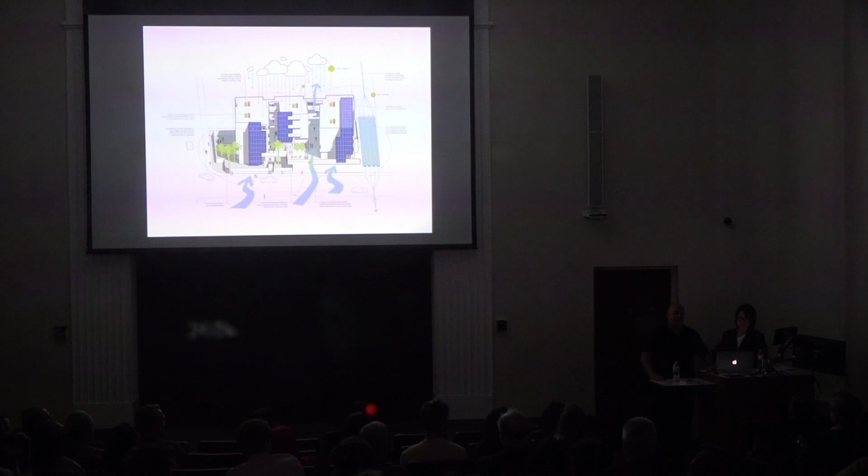That was our first housing project, and we basically begged that client to hire us. We thought we were just doing the right thing - my mother would call it Jewish common sense. It was the first LEED certified building in the country. We actually helped them develop the standards, and at the time we just didn't think we were doing anything special.

It was a building designed to be energy neutral, so we had two active systems: solar panels and a microturbine. In the city of Santa Monica in 1994, they called themselves a sustainable city, and they were trying to formulate these goals for themselves, so it was a demonstration project.

Each unit was only 375 square feet. They were very tiny, and all you really need is one window on each side of your unit to get cross ventilation and keep the units cool. The whole project was designed to capture prevailing breezes and really be a passive building, and I think you all know what that is.

44 small studio apartments for people with extremely low incomes, and the project wears its energy-generating solar panels on its sleeve. It has a large stormwater system under the public alley in back that collects rainwater from the entire block. A lot of the project images show you the density - this is 127 dwelling units per acre, because we think there's a direct link between density and livability.

The solar panels for us really gave this building a sense of dignity. We had to get state legislation changed to allow projects like this to be built - the solar system was actually larger than allowed by the state at the time.

Each element on the building does more than one thing. The walkways actually shade the south facade of the building, and the solar panels are hung off of the exit stairs.

We use really simple materials that are inexpensive and don't need maintenance. The walkways not only shade the building, they also hide the downspouts and gutters - which is one thing I really hate seeing on apartment buildings - and they direct all the rainwater to the alley.

The solar panels that shade the walkways also let light filter through them. This building has no need for air conditioning and has very minimal heat. The units are really tiny, but basically it's everything you need.

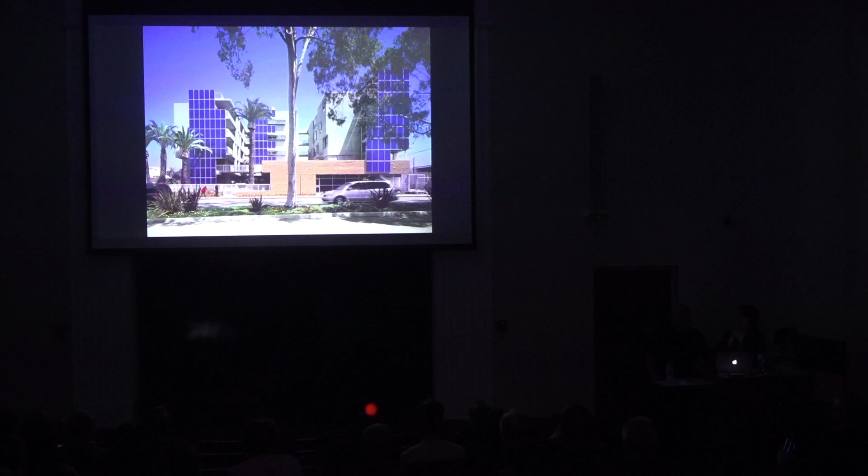We thought it was easy. Our motive in some ways for getting into it was selfish, because we'd look at other affordable housing projects and think, it's really easy to do better than the stuff they're building. But we began to think, is what we're doing really any better than this?

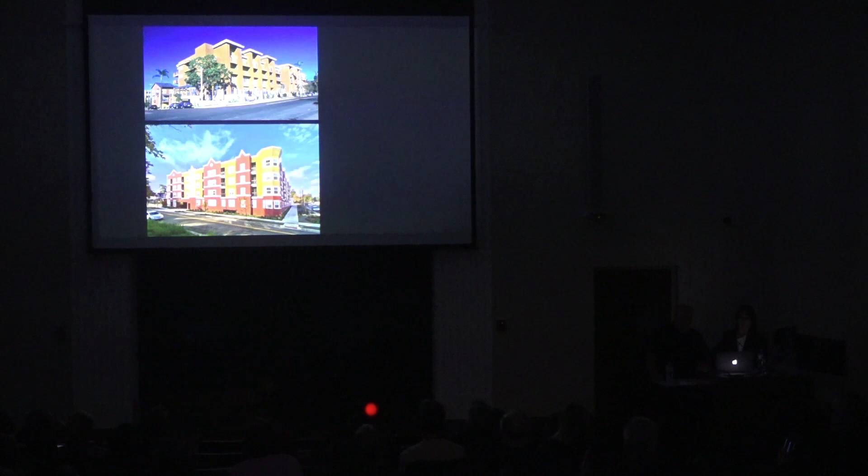So it was at that time we talked to some of our friends, and we started to meet in our office the first Saturday of every month to talk about issues surrounding housing, affordability, and sustainability, and to work on ideas where we could not just change design, but change policy - and also work with other developers.

We knew Los Angeles needed to densify, so we actually held planning charrettes on the weekend, invited friends, and tried to visualize good neighborhood density. How many acres should one architect design in a neighborhood? I think we came up with 2.

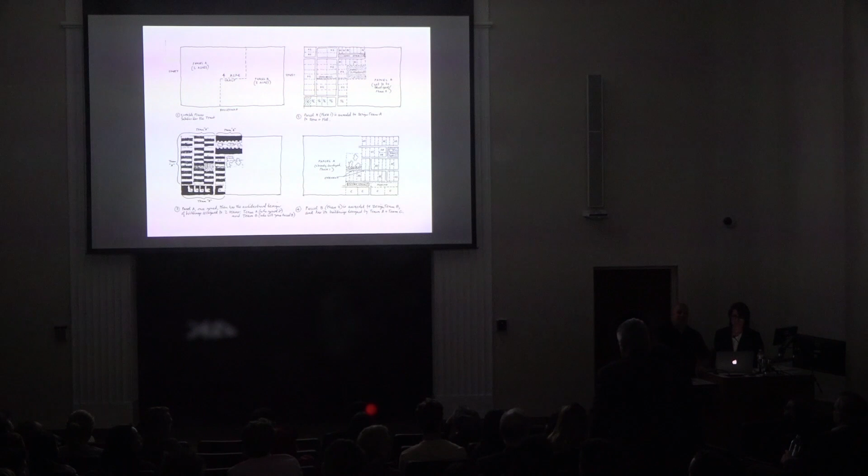This was something Roger Sherman did, where we looked at densifying the single-family neighborhood, which everyone was telling us was political suicide - and we're going to come back around to this later in the talk, because Los Angeles hates two things: sprawl and density.

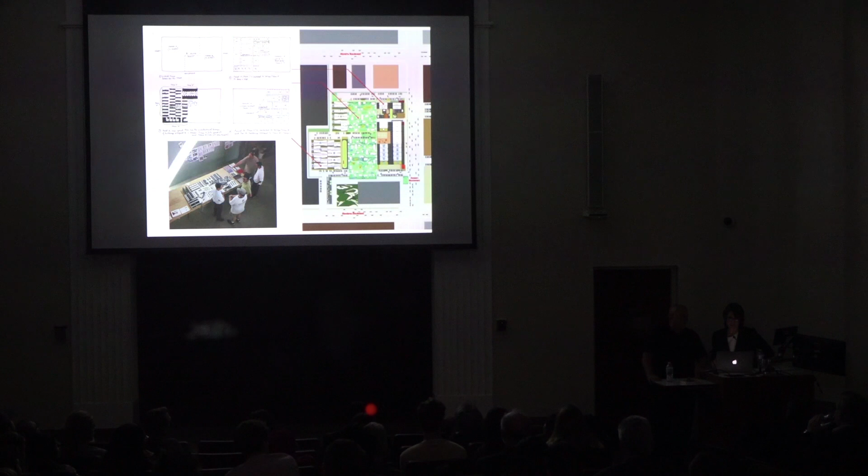We researched what other states were doing, and the state of Massachusetts has a law called the Anti-Snob Initiative, which means that any political jurisdiction, if it's not building enough affordable housing supply—less than 10% of total housing—then the zoning is automatically deemed discriminatory and can be ignored by any developer. So you can go into a single-family subdivision and build multifamily affordable housing by right. They found it also helped geographically disperse income levels.

We wanted to prioritize the benefits of good design as a way to both solve problems developers thought were intractable and create better living environments. We got an NEA grant to do a competition to build the project, which we did in Long Beach. This is actually Olivier Touraine's entry to our competition. He didn't win, but he was very close at the time.

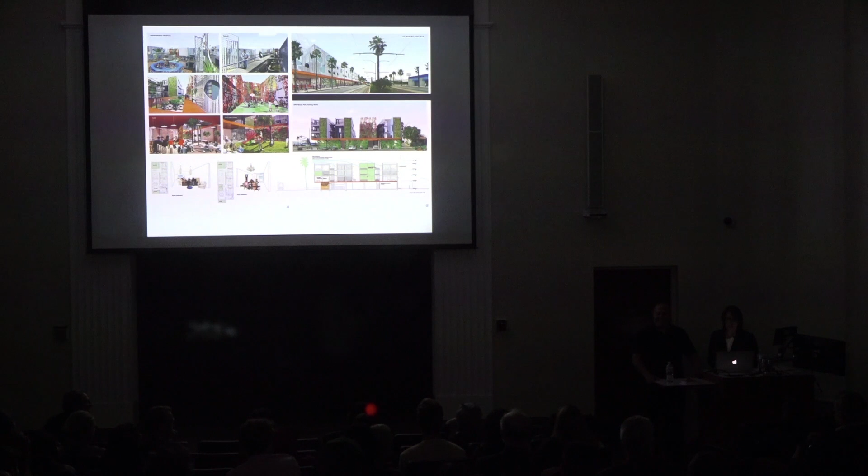We were looking for new ways and new models of how we could provide housing differently. This project is along the Blue Line on Long Beach Boulevard, and we discovered that the City of LA was building transit and transit stops in areas zoned industrial where no one actually lived. There were zero people living within a quarter mile of this transit stop because it was illegal to build housing there. When we went to the city and told them that, they said, no, that can't be right, and asked where we got our data. We said we got it from them. At that point, they said, well, we have to change that. So they upzoned Long Beach Boulevard to allow housing.

But average monthly rents keep increasing, and that eats up a large percentage of household incomes. Affordability is defined as not spending more than 30% of your income on rent, and in Los Angeles almost a third of us spend more than half our income on housing. It used to be that if you worked you could get ahead, but now we have what's called the working poor, and housing is getting more out of reach for everyone.

At our current minimum wage, in every state in our country, one person working full-time with two kids would live near or below the poverty line.

After we were working with our group—just kind of a ragtag group of people, bankers, affordable housing developers, for-profit developers, architects, landscape architects—we spent the better part of a year and a half doing all these ideas, and we said we should try to do something more meaningful. So we wrote some grants and wound up getting almost $1 million in grant money.

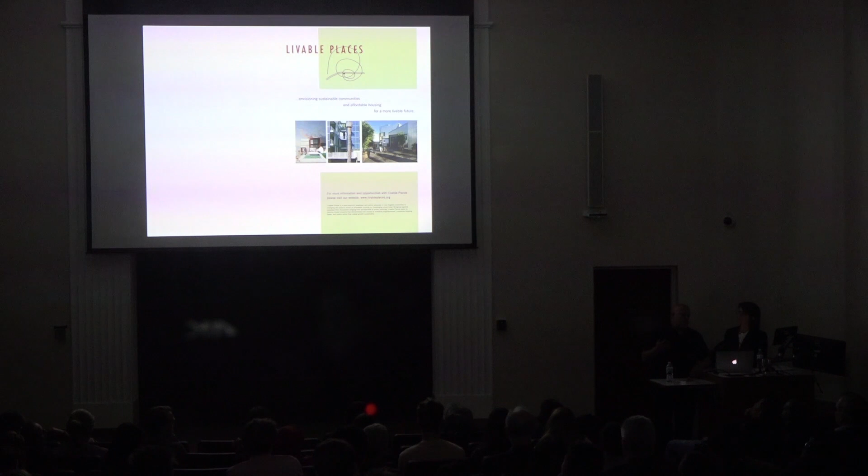Overnight we became this nonprofit called Livable Places, which was really our night job. When we started it was our group, and eventually we wound up with a full board doing policy work. Our goal was to build model projects and use the developer fees to finance policy work—we didn't want to just do buildings, we were looking to affect change through policy. What turned out is our policy actually drove our development, but we did build some buildings.

This is one of the first buildings we purchased, in Lincoln Heights—the old Fuller Paint Company building. It's an area just outside of Los Angeles, and we realized our new light rail at the time, the Gold Line, went right by it. So it was another neighborhood where we built transit and no one actually lived there. A lot of industry was there, it's an industrial zone. The site sits within a quarter mile of a Gold Line stop, a park, and a school, and no one was living there.

That's right across from the old prison. But with political support—the council member at the time agreed that we should have transit and housing in the same neighborhood—he agreed to work with us on this project.

So we purchased the building and added 2 floors to the roof. It's 102 condo units, both commercial and residential, mixed use and mixed income levels. There's affordable housing in the yellow piece, the existing piece, and market rate housing above. We basically cut a hole in the middle of this big concrete building to let light and air get into all the units, and wrapped a large exterior patio and frames on the roof. You get really good views of the city and the mountains.

But the principles of smart development were illegal at the time in this area, so this was really a demonstration for us, and we wanted to make an example that others could follow. It took us an entire year and 25 planning variances to allow what would be considered smart growth today—things like reduced parking near transit, additional height, additional density, narrower streets.

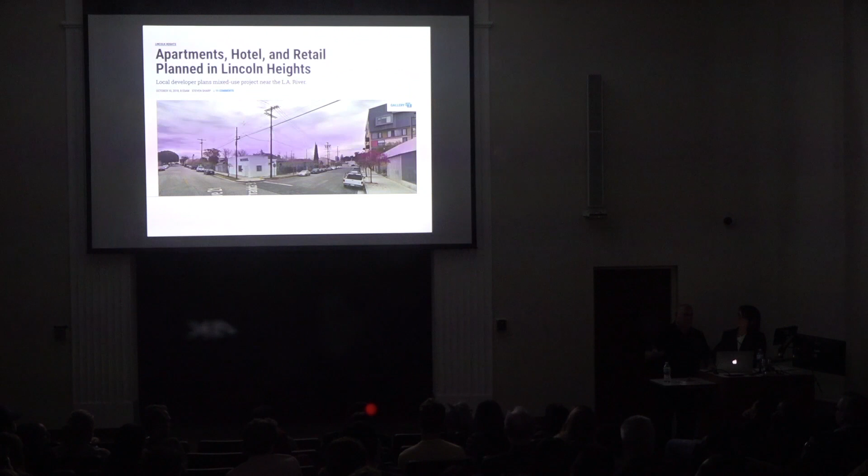Developers came in and bought all the property around us. So we were now out of our own market, and we had kind of mixed feelings about it because we were achieving our goals of helping revitalize the neighborhood, but we were no longer a part of it because we couldn't afford it. And so most of you that are here now know what's happening with Lincoln Heights, and we were really the first people to go in there.

So this is, not too long ago. This is this past year. Now the old prison, the city put out an RFP, and they're moving forward with these kind of grand plans for Lincoln Heights.

And the sad part is this is what's happened to our project. These were meant to be for the poorest of families, and now these units are selling for $500,000 in there.

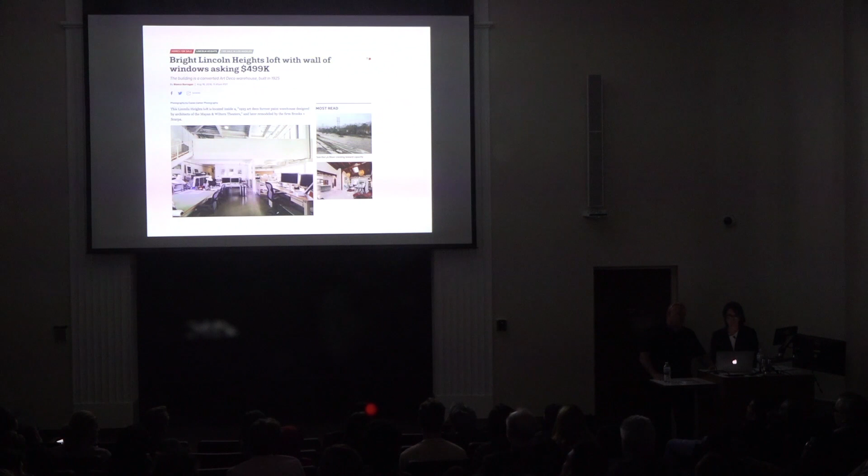So this is something we struggled with as a group. Should someone be able to profit from their unit? How do you deal with keeping things affordable? For us, it was all new and a bit of a learning experience.

And the market also crashed, right, when we started construction. Minor detail.

But going back to what Angie was saying about the city not knowing their own rules, they would come up with ordinances like promoting density around transit corridors, and we would show and prove to them that they had zero housing in their transit corridors. So we started to do all these different studies, and we became very close with the planning department. I'm not sure whether they liked the way we were, because we were constantly throwing planning amendments at them. That was when the planning department just processed permits and didn't really do any planning themselves.

And so we were doing the planning for them, and this one was a bikeway study. We showed them that LA actually had bikeways, but they were all disconnected. And this was our plan to show how they could stitch all the bikeways in LA together and make it like a unified system.

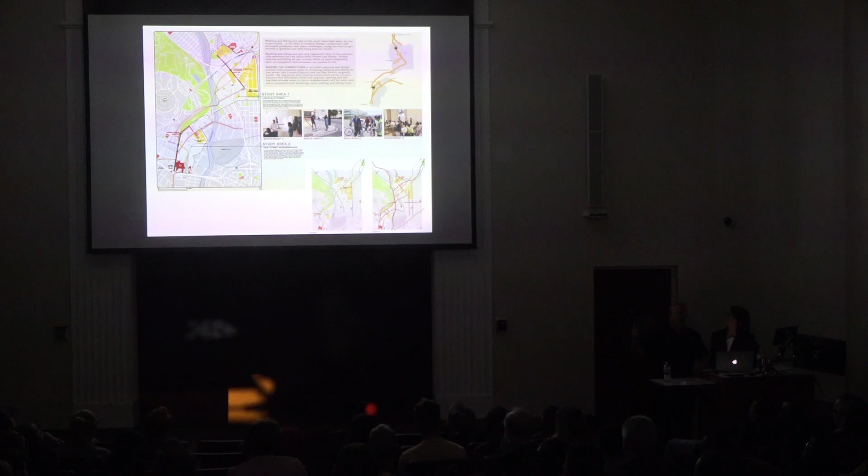The other thing we did, which really stuck, was we actually wrote the Small Lot Ordinance, which most of you are probably familiar with. That came from our group, and we put that forward as an idea, which goes back to that diagram I showed you that Roger sketched out one Saturday of densifying the single family lot. This effectively did that. If you know the ordinance, it really changed density in a single stroke.

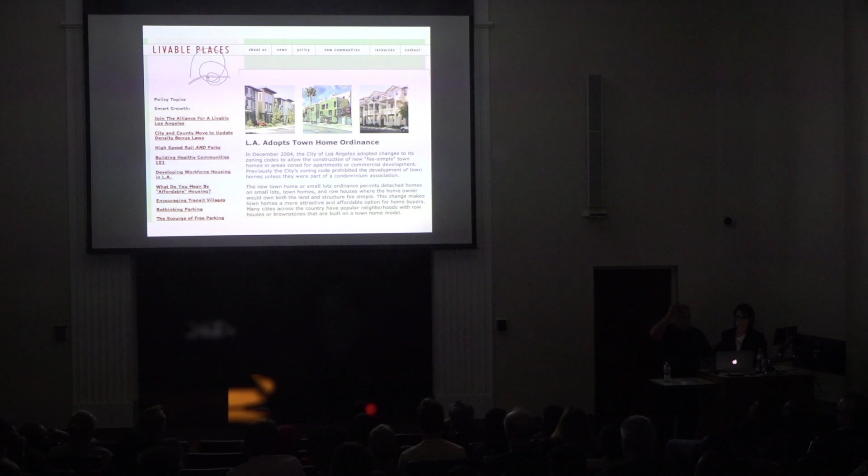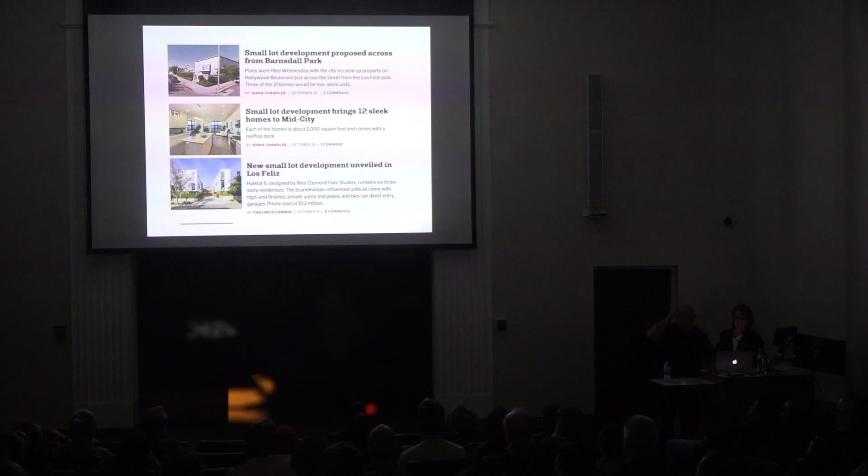And the city took it and they adopted it in a little bit different way than we wrote it. But now there's actually a website for the Small Lot Ordinance. And those of you who practice have probably done a lot of projects through this ordinance, and I'm just kind of tracing some of the history of what's happened with it, and even the projects that were built.

We see them, they're not even ours. This one is our project, but some fantastic projects have been built through this, including ones that we continue to do. So we're benefiting from our own push to change policy.

But like all good things, people start to question it. So we always thought policy was like forever, but what we're also learning is that it's not permanent either.

And so now there's a lot of talk, they've made changes to this ordinance. And what's funny is when we go in there and talk to them about our projects, they tell us that's not the intention of the ordinance. And I go, well, that's kind of funny, I think I know a lot about what the intention of it is.

Who doesn't know who this is? Okay, everybody knows. You might wonder what state policy and bodybuilding have in common, but I will tell you.

This is Arnold Schwarzenegger, a famous bodybuilder in California who was also an actor. He was the Terminator, for those of you too young to have seen that movie. And then he became governor of California from 2003 to 2011.

I believe that in order to create beautiful, sustainable buildings, our codes need to change, so the bottom needs to come up, and that is now happening in our state because of Arnold. He got a bill passed in 2006 called AB 32, our state's long-term approach to addressing climate change in California.

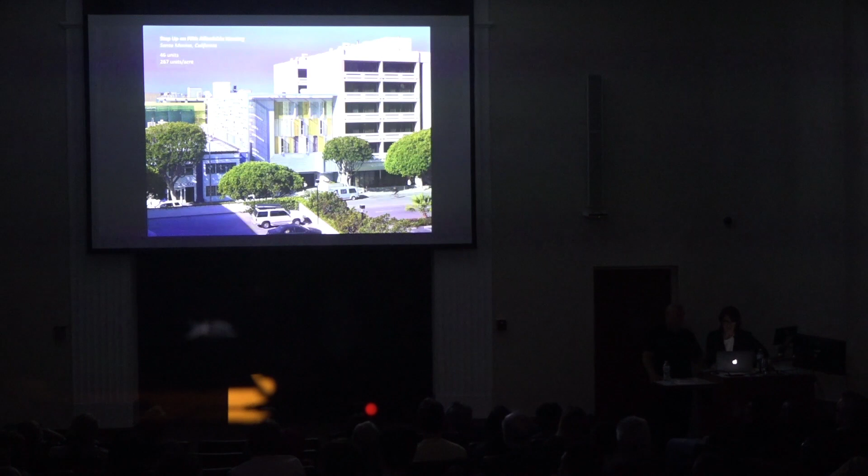If you notice the density on this slide, which is super high, 267 units per acre in a type 5 building, that's almost as high as Manhattan in a 5-story building. And this building performs very well passively.

The front facade is created from water jet cut aluminum panels, anodized different colors. We look at something that can be standardized and then figure out ways to make it look more complex. So this is actually one pattern, the same size. All these panels were stacked up and water jet cut one time.

Well, actually 6 at a time. So it made it really cost effective, but it's a beautiful and performative facade at a relatively low cost. And I'm just realizing too, we're still doing that, and our project's at a different scale now.

This is a plan of the building, and this is how we used to design buildings over 100 years ago when we didn't have air conditioning. They were called alphabet buildings. The plan of all the buildings actually looked like a letter because you had to design little courtyards so that all the units got natural light and cross ventilation. So that's what we did here.

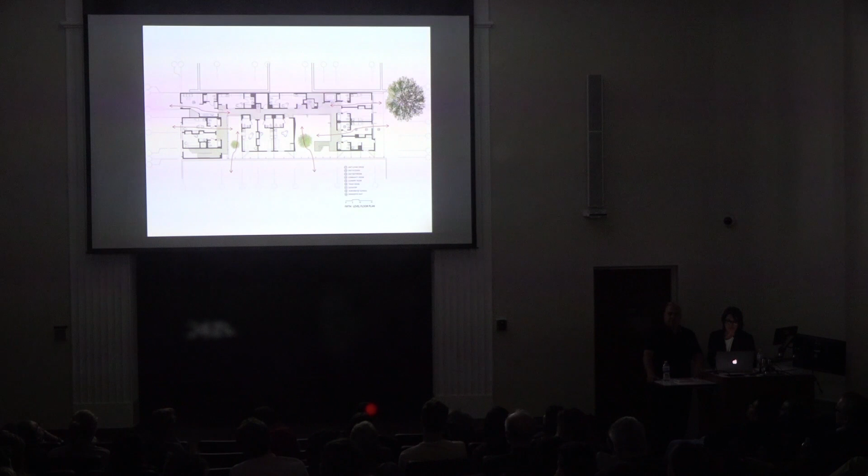There are 2 small courtyards, 2 large rooms for kitchens. The units themselves don't have ranges. We tuck the elevator away, but every unit gets cross ventilation and light. The diagram is basically 3 boxes and a bar on one side, all connected by exterior walkways.

It's really an instance where policy and reality don't really align. We had to use mechanical lifts in a subterranean garage to park all the required cars there for a building with tenants where no one actually owns a car.

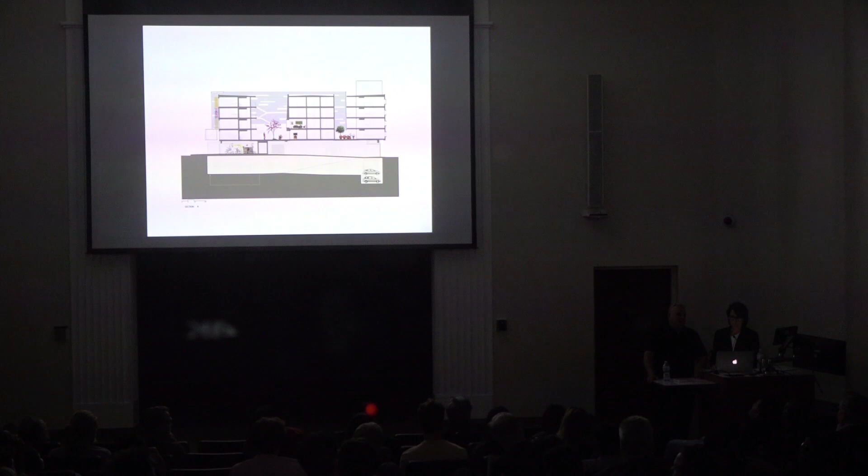The city funded this project, but they made us do the parking. It cost $2 million to do the parking on this job. They said if we didn't want to park, even though there was an exception in their municipal code for exactly these kind of projects, we'd be required to do an EIR. For affordable housing, that's the kiss of death. So we spent $2 million really just to avoid an EIR. Our client said just go ahead and do it. And because he has a covenant for the next 60 years, he cannot lease those parking spaces to anyone else either. It's one block from the Promenade.

This is what's crazy about affordable housing policy that we always try to change. More architects need to be policymakers, if you're getting that drift. But we take things like exit stairs and other required elements and try to actually make them into a design feature, so that people actually use the stairs rather than the elevator.

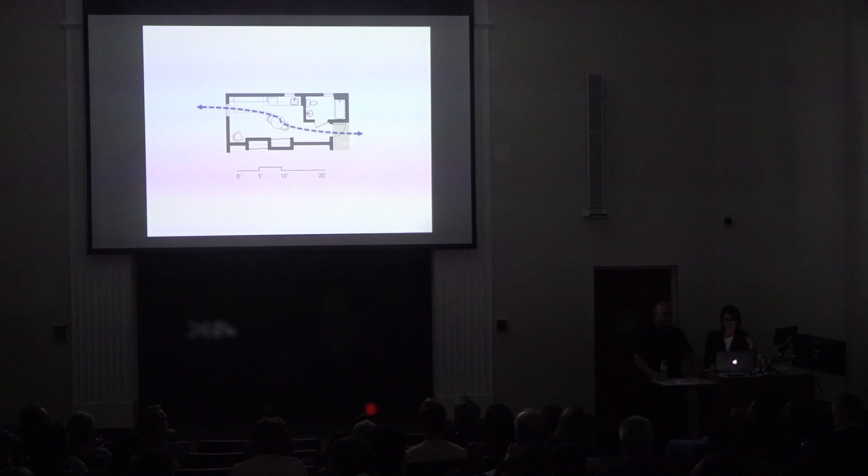The two big kitchens are these big recreation rooms that look into the main courtyards, and you can see the perforated screen gives really nice perforated light. The units are super tiny, 240 square feet. But if you think about a homeless person going from the sidewalk to an apartment, for a lot of people that's a really big step. One of the tenants at this project told me he slept on his floor for an entire year before he could actually sleep in his bed. It was such a big step for him. But even at this size, we can get cross ventilation through the unit with a little transom window above the front door, and Murphy beds and a tall window really make your unit appear bigger.

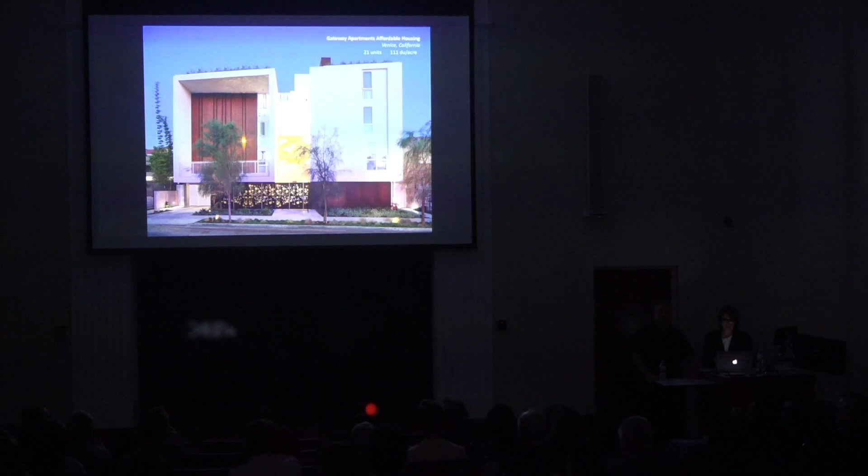A lot of the affordable housing we design is what I call infill on really small lots. This is in Venice, the Delray neighborhood, which has some of the smallest lots anywhere Venice does. This was two lots, 80 feet by 116 feet. It's a 4-story building, 21 one-bedroom apartment units, basically conceived like two bars with an open space between them. The second floor has a tiny little courtyard on it. There's a tiny parking lot behind the front community room, but the site was so small that we had to put all the open space on the roof.

In Los Angeles now, every building rooftop has to be what we call solar ready. You have to set aside a certain amount of the roof for future solar, because ultimately we're going to be a 100% renewable city. So benches and planters on the roof actually share the space with the solar panels.

You might think it's too expensive to build housing for homeless people, but leaving a homeless person on the street actually costs Los Angeles an average of $35,000 per year if you count medical, emergency, mental health services, and law enforcement. Jailing that person pushes that cost up by a third to about $46,000 a person, and an investment of $10,000 can help that same person obtain housing, food, job training, and support services. So it's actually cheaper for us to house people and help them than to leave them on the street. But in Los Angeles, we're really not doing enough.

Voters in 2016 approved a few ballot measures, actually by a landslide—I think 70% of voters approved this—to fund housing and support services for the homeless issue we have. We also voted to raise our sales tax by half a cent to expand public transit. But we see articles saying we can't build it fast enough and we can't build it cheap enough. The money is there, but we still have homeless people on the street. The political will is really slow to change.

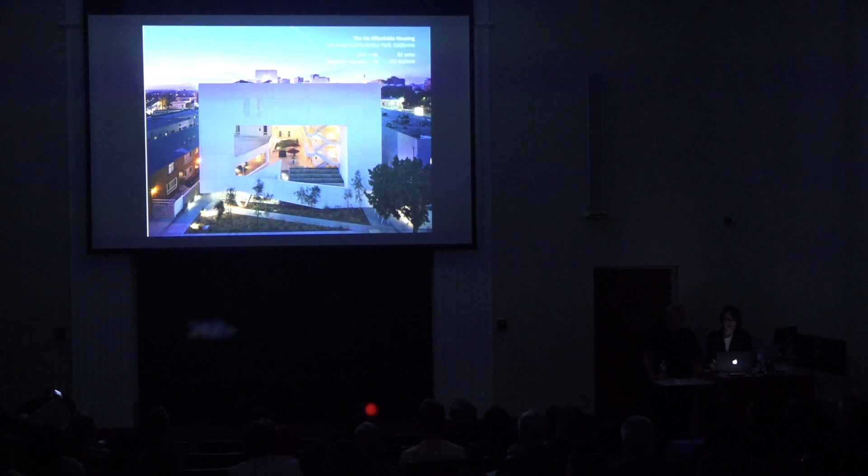This is a project we did for the Skid Row Housing Trust, which is being used as an example or part of the solution. It's for homeless veterans, and it's called The 6. Almost 10% of our homeless are veterans. It was designed like a lot of our other projects, as a courtyard building so that all the units can be passive. All the open space is in the courtyard and on the roof, and solar panels are on the roof. This is a LEED Platinum building as well—most of the things we're showing you are LEED Platinum. We don't talk too much about it. They just are.

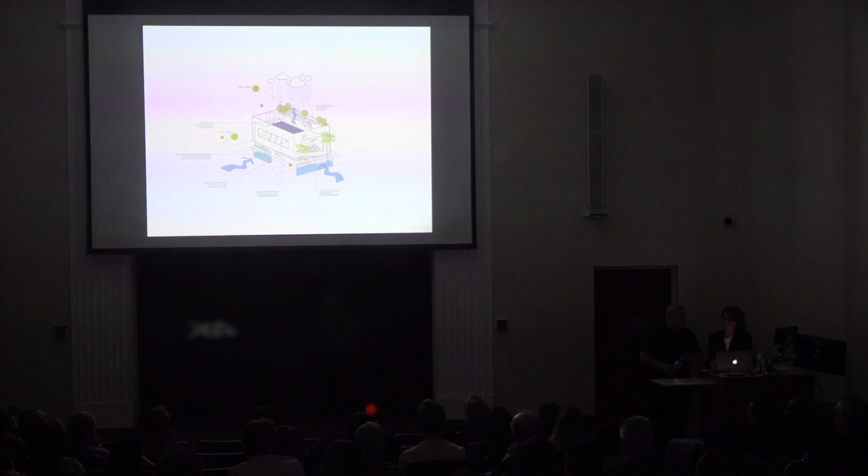I don't believe sustainability is a design concept. It's more of an ethical decision. I've never heard any of my friends go around and say, 'Isn't my building great? It's ADA accessible.' It should just be code and we should move on, we should just be doing it. And we always try to talk to our clients about that as well.

This one is in a neighborhood of already large apartment buildings, and it's 52 units. It's a combination of studios and 1-bedrooms. It captures all the stormwater.

The courtyard on the second floor is shown here. There's a computer lab and parking on the first floor. The units span the front of the courtyard to create this sort of box, and it allows us to have different spaces for circulation or hanging out throughout the building vertically.

By stepping the courtyard down towards the sidewalk, you can see it in this section. With a planter, it allows us to make a more protected environment for the tenants. We had a group of tenants who were previously homeless actually advise us during the design of this building, so they have a visual connection to the street, but it's a physical separation. They didn't actually want to be physically connected to the street any longer. You're giving up our secret where we get all our ideas from.

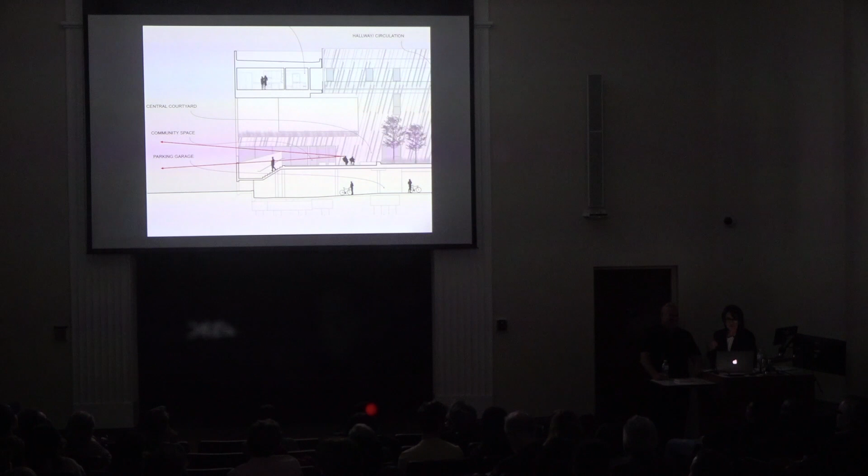Another thing doing this to the courtyard does is eliminate the high, usually ugly guardrail that you see at the edge of the deck. So you can actually sit in this courtyard and see into the street and feel more connected to it, and you feel more open.

It's Skid Row Housing Trust's first project off of Skid Row, and our Skid Row is a place which has the largest concentration of homeless people in the entire nation.

These are images of the courtyard on the second floor, which is open to all of the units, so everyone actually circulates through this space. There's a large kitchen and recreation room off of the courtyard with a large sliding glass door that opens. The art was provided to the client pro bono by the Marciano Foundation, so there's art everywhere hanging outside the building too.

The building's density is 153 units per acre, which is pretty high. The courtyard, though, is critical to the building performance and to allow the tenants to socialize. It's a much bigger building than some of the adjacent neighbors, but by creating this void space in the middle, it brings the scale of the building down.

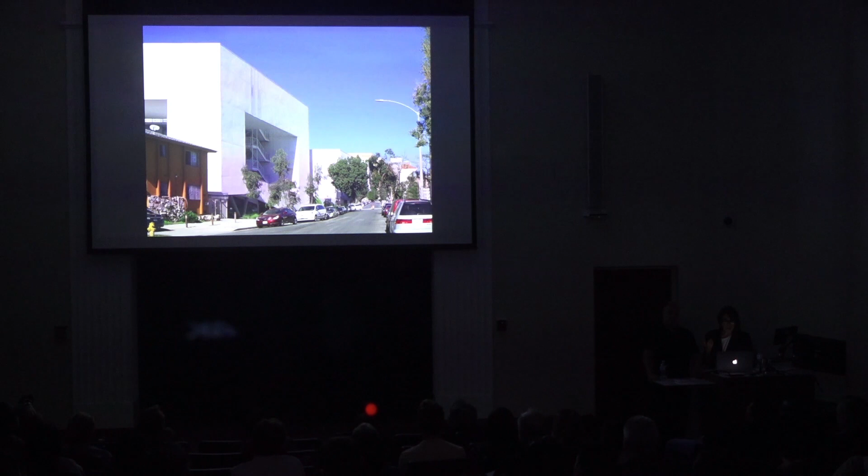Most of the people walk to this building, so we really wanted this strong connection to the street. By framing the building this way, it articulates the entry and makes it appear much more inviting and open. That's the computer lab, and actually the entry to the units above.

The open spaces on the roof, the sculptural forms that we designed on the roof actually hide the code-required kitchen exhaust and subdivide the roof into smaller areas. So this is really a quiet, zen-like space that has really great views of downtown LA.

There is a direct correlation between the ceiling height of these small units, the height of the window, and the amount of natural light that gets into the space. On the right of this are two tenants that were featured in the AIA's I Look Up Film Challenge a couple years ago, and I'm just going to play a small clip of that film for you.

You want some water?

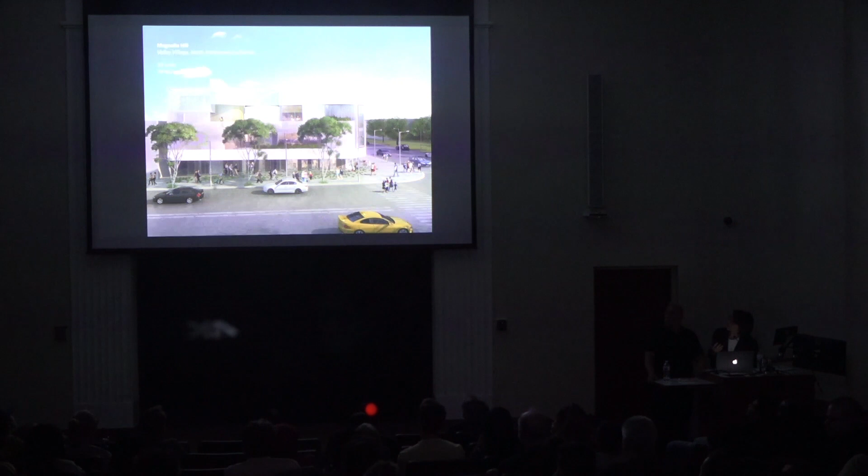In both of these projects, we use courtyards to reduce the energy loads, but also because people like them. They're social spaces, good ways to transition from the public street to the front door. These units all sit above commercial space. It's a corner lot, which is really great—it used to be a gas station. We're using metal siding in both solid and perforated forms, so some walls appear solid and some translucent. It's a really great, articulated, relatively small building—19 units.

This is another one for Danny, called Camarillo Apartments, which also has commercial on the ground floor, and a portion of the units are affordable. It's organized around a courtyard again. It's on a busier street, but both of these projects are really designed from the inside out, as a series of spaces for people to circulate and socialize.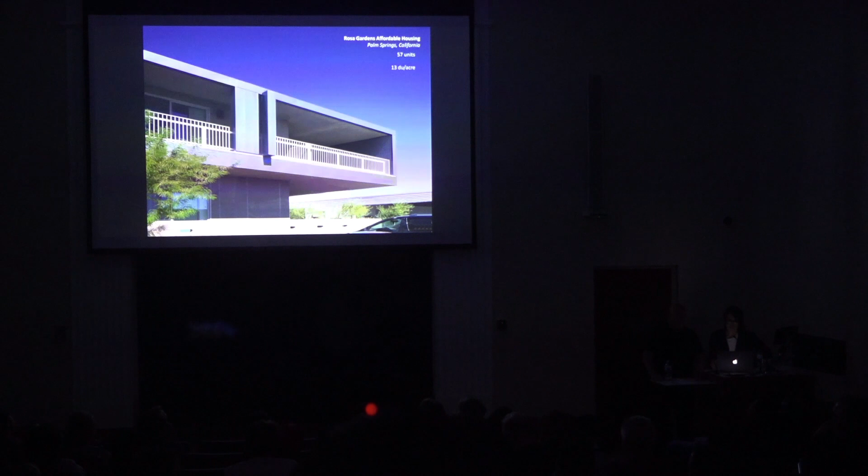The way we design also stems directly from the climate of the region where the building exists. This is Rosa Gardens, in the desert of Palm Springs—57 units for families. This is another project designed passively, but the climate's a little different here. It's really a desert climate, sunny and dry and hot. The average temperature is 75 degrees, so what you want in that kind of climate is large overhangs.

Shade is really important, so all of the buildings are organized around a series of on-grade connected courtyards of different scales. We put the parking on the perimeter so we could leave a lot of the open space internally for people. The colors of the building come from the landscape.

June through September, the average high here is above 100 degrees, so we were really conscious of large overhangs, shade canopies, and recesses. These spaces actually do more than one thing—they're circulation paths, and they're also gathering spaces for the people who live here.

This is one of the smaller courtyards, and this is the large courtyard. This project was done for $76 a square foot.

It's low, two stories, low and long, but for Palm Springs, they actually consider this a very tall, big building. We use material changes to articulate the facades, and like all of our other projects, we use a variety of low-cost materials—stucco, metal panels, cement board. You basically leave your car on the perimeter and circulate through different kinds of public spaces to get to your front door.

You talked earlier about step up and the perforated water-jet-cut panels on that building. We always have tough budgets, so we're always trying to find a way to get the maximum design out of our project.

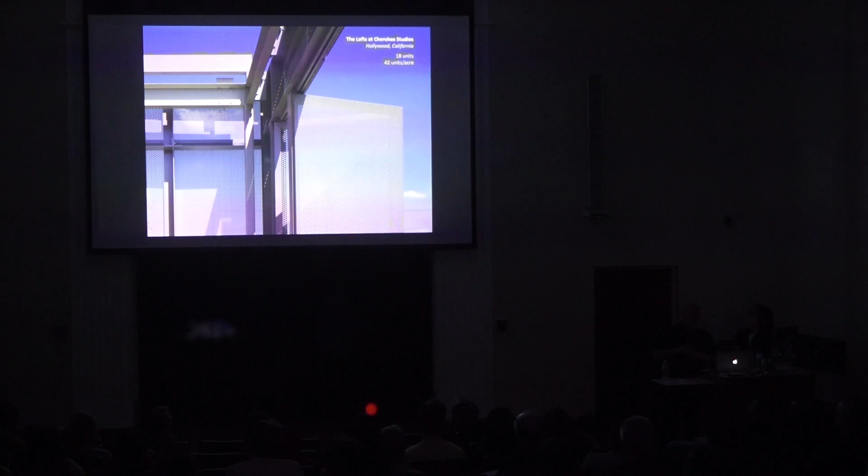This is a market-rate project in West Hollywood, and we worked with a company called C.R. Laurence to design the shutters for our building. It has great views downtown, great views to the east, and great views to the west, so you want big pieces of glass.

That's counter to what works from a thermal perspective. It's also on a busy street, so big glass means privacy issues. So we used the screen to mitigate a lot of those things, but also as a design idea.

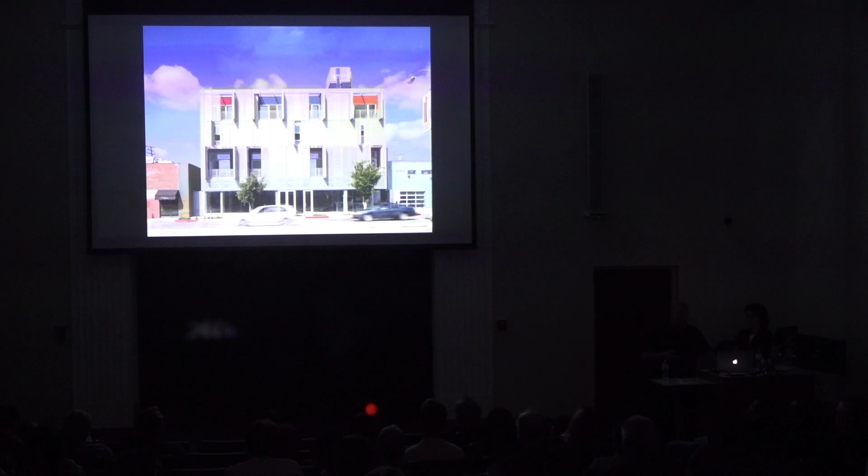I got very interested in the idea of movement, and how things could move and change. So the screen for us became a way for tenants to control their environment thermally, and also, when they wanted privacy, they could close it.

When they want to be open—if people like to walk around in public naked, they could do that. If they don't, they can close the screen. So it became a way the building performed this function, but it also, from a design point of view, literally changed every day or even every hour.

And what we learned is, yes, it costs money to put this on the building, and our client at first said, well, that's really expensive to do all that.

Can we take it off? And I said, yeah, you can take it off. So he said, that's great, we just saved like a couple hundred thousand dollars. Then our mechanical engineer said, wait a second, now we have to add more air conditioning because it's all exposed. Oh, and we also have to change the windows because they have to be higher performance. And it went on and on. By the time they figured it all out, it was maybe about $50,000 difference. Our client said, you mean I can get all that for only $50,000? So suddenly it turned out to be a good deal.

And it's a really simple idea. It's pretty much a stucco box with a screen around the building, and you get these wonderful light-filled units with cross ventilation and so forth.

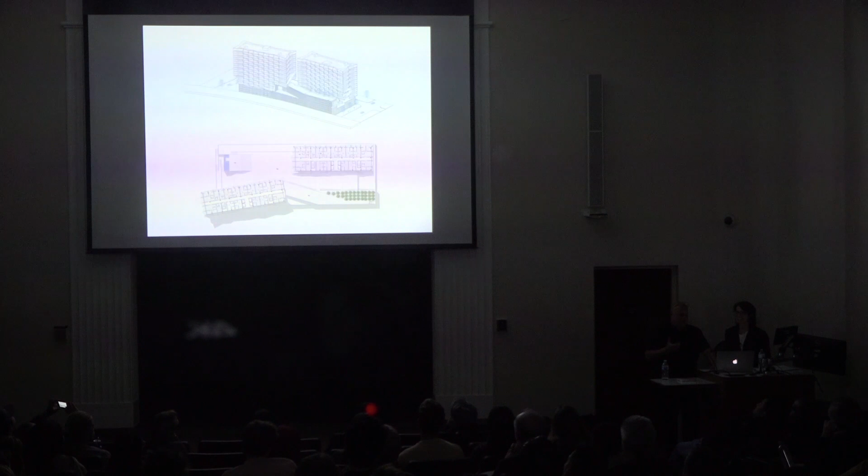This is about a 400-unit project just in downtown, two 20-story towers. Every little dollar matters—developers are smart, they squeeze as much as they can out of you. So you've got to find ways. In this case, we just worked with the edges of the building, the balconies. So the units are what they are.

We looked at a concrete slab—this is normally what it would be. But if you just shape the edges, which is very little cost difference, and look at how you configure that, you can get something pretty dynamic and interesting. When you apply that over a large surface, it's pretty economical, but you can adjust it to thermal conditions, adjust it for form, adjust it for a whole variety of reasons at very little expense.

So what you get is a building which is both simple and rich, or simple and yet appears complex. We get that a lot with our projects. Even a lot of the nonprofit developers tell us, when we get hired, that they were afraid to hire us because they thought our buildings were too expensive—and they're really not. We work hard at that cost issue.

So this is another project. We're working with the Southern California Flower Market in downtown LA to add 300 apartment units above their existing industrial building and wholesale flower market. They've operated here since the 30s or 40s. It's a wholesale flower market that started with Japanese growers. They actually formed a real estate cooperative here before Japanese people were interned during the war. After the war, they came back, and the only flower business going on downtown was this real estate cooperative they had formed. So they now own almost the entire city block, and we're working on this project with them.

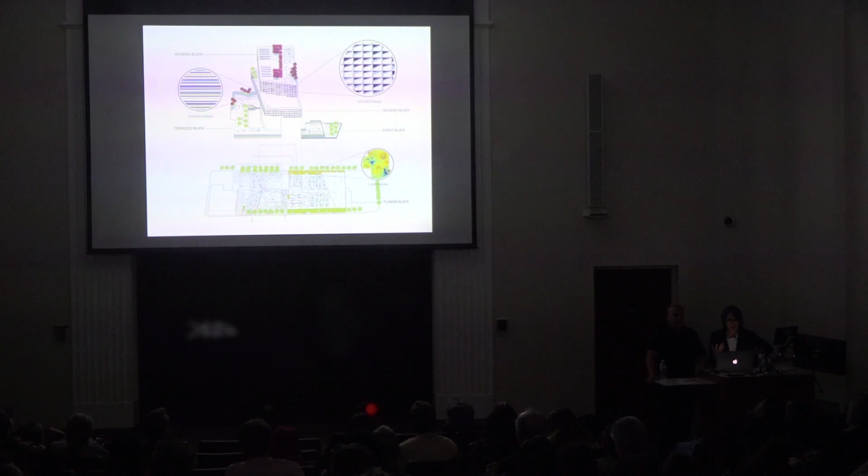We're also trying to honor the flower through the design of this building, through the use of color and patterns. The balconies that wrap the building use the method Larry just described, but in different colors, so they either appear as a honeycomb or as horizontal lines of color, which also shade the windows.

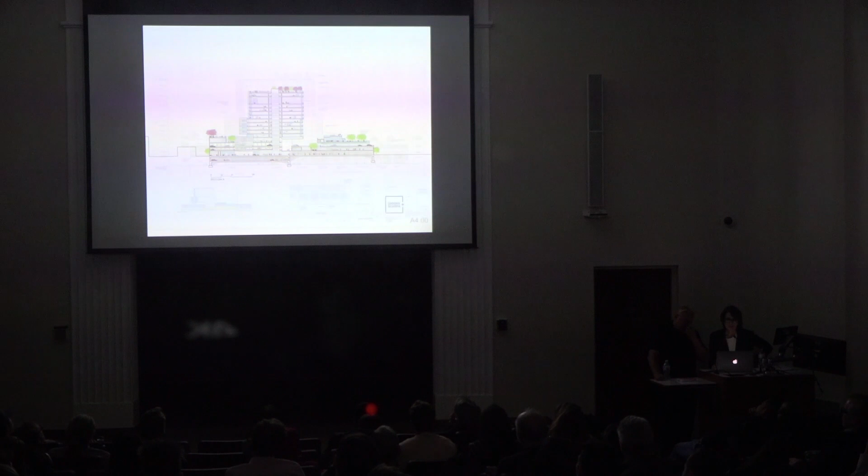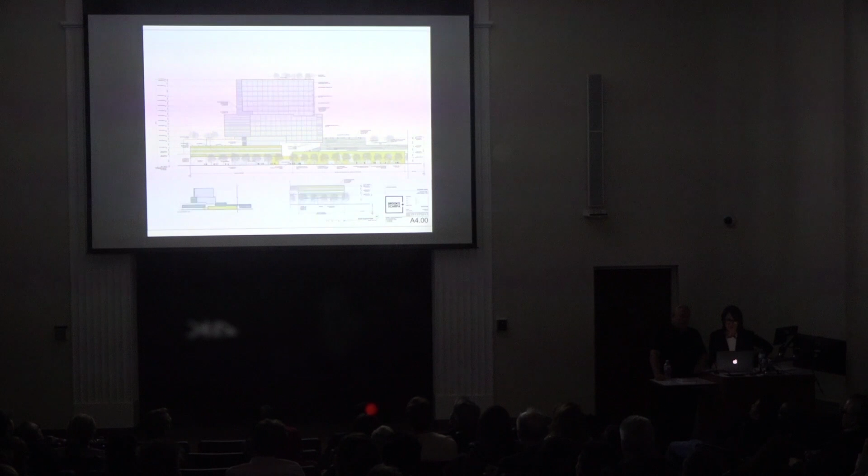The existing building, on the right, we're going to paint with a big flower mural. The original industrial buildings had rooftop parking on both, so we're keeping that, and then creating more spaces above it for people to socialize.

It's about 22 stories, all concrete building. By putting it in the middle of the block, we're able to really capture a lot of sunlight, and by twisting the top piece, we're able to get units with different views. This is an image of the new residential tower between the old building on the right and the new one on the left.

And this is looking down into the paseo, which is going to be a public paseo through the block. The City of LA has design guidelines for downtown LA that I think are really good, but they're just principles and recommendations. One of them is to not have a building longer than 150 feet, which I think is great, so people can actually circulate through the block and up and down through the building above the paseo.

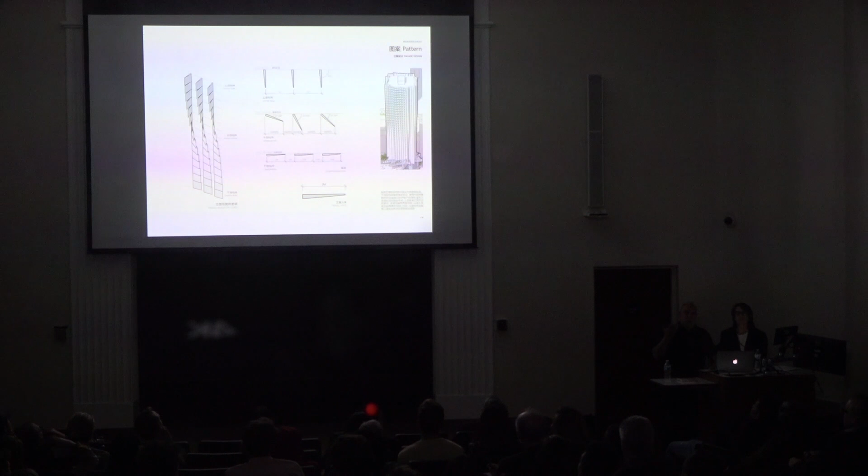It's a similar strategy from the last project, playing with the edges, and the result is a system that appears quite complex but is really pretty rational. We just finished a design of a project in Shenzhen, China, that uses the similar idea. It's 2 towers, but built from the exact same size panel over the entire building, and it's the way they're placed, a single repeating element, that really gets its design.

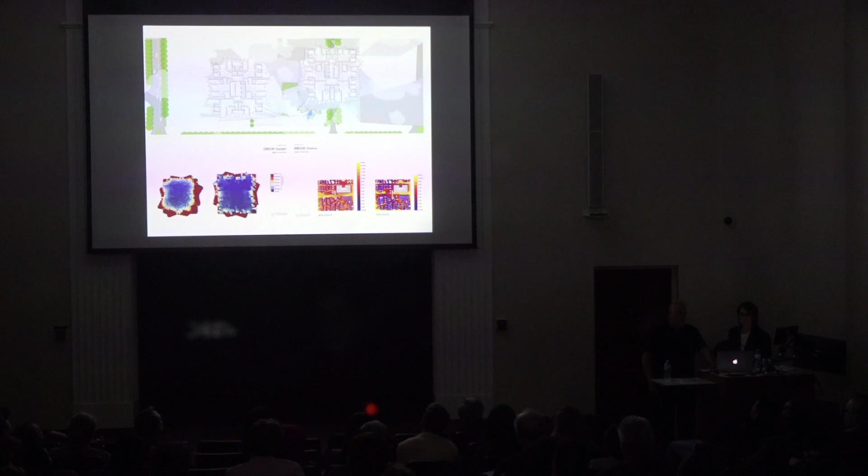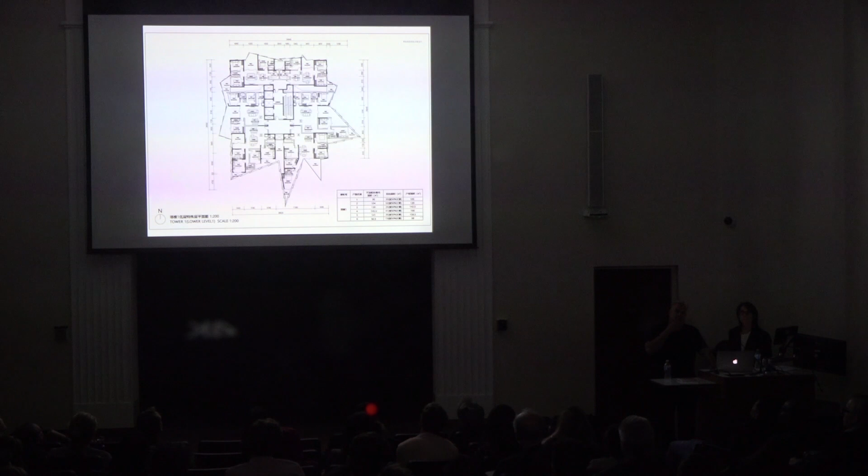I never realized why all the housing projects in China look the same - it's because of the daylight requirements for the units. I was shocked. Even early on, you have to do modeling that proves how you're getting daylight into the unit, which can result in what appears to be some pretty dynamic plans. Again, the core is pretty rational, and it's just the perimeter that shapes to give you a building that, like the Cherokee lofts, as you move around it, appears to move.

When we finally disengaged ourselves from Livable Places, it was kind of our night job, and we did that for close to a decade, and went back to our regular job. Angie, in some ways, had enough. I did too, but I kept thinking, and I had this idea to do something more with affordable housing.

I was having dinner with a friend of mine who at the time was the head of the NEA, and I told him about this idea. He said, 'You need to write a grant.' So I wrote a grant, and we got a $50,000 grant. And if you don't know Larry, he doesn't say no to anyone, he never says no. So it was this idea modeled after the Mayor's Institute on City Design.

We would educate developers, nonprofit developers, on how to do better housing projects. We would bring in architects, landscape architects, developers, and hold this 3-day institute. It was meant to be a one-time deal. We're now on our 9th year doing it. It's called the Affordable Housing Design Leadership Institute.

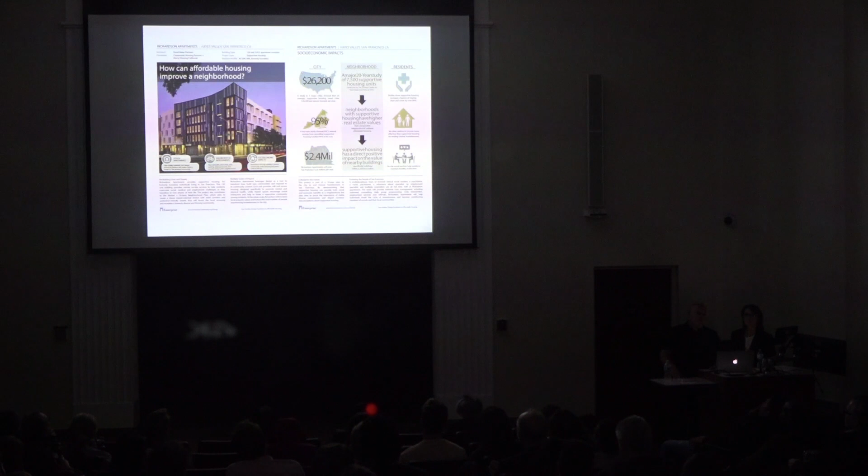As part of the institute, we also publish the proceedings from the institute, and you can go online and download everything for free. We also do other publications that make cases for well-designed affordable housing, and all of this is free. We've even developed a pre-development design toolkit for developers.

If you look at a pie chart, and we've made these within our organization, the architect is the little speck within the chart of how affordable housing gets done. So our goal was to really make the design a big dot as opposed to a little tiny dot, and this is a vehicle that's kind of helped do that.

So what I like to say is Angie and I work in parallel universes. We have our traditional practice where we're building buildings, but we're also working on a different front that maybe makes bigger changes, so that we don't always have to fight with the city or the building department to make the change - it becomes law and we just follow the rules that we like. But this is a big project in the panhandle of Florida.

This is 700,000 acres. This is what our client refers to as their B property. It's not on the coast, but it's incredible. If you were to drive this from end to end, it's 21 miles. And so they have to preserve a lot of this land.

And they've asked us to look at ways to make it denser and do new communities. They have this idea for a senior community, and they've shown us these pictures of this place called The Villages in Central Florida that's making like a killing financially. So they showed us all these great pictures of retirees having fun and doing all this.

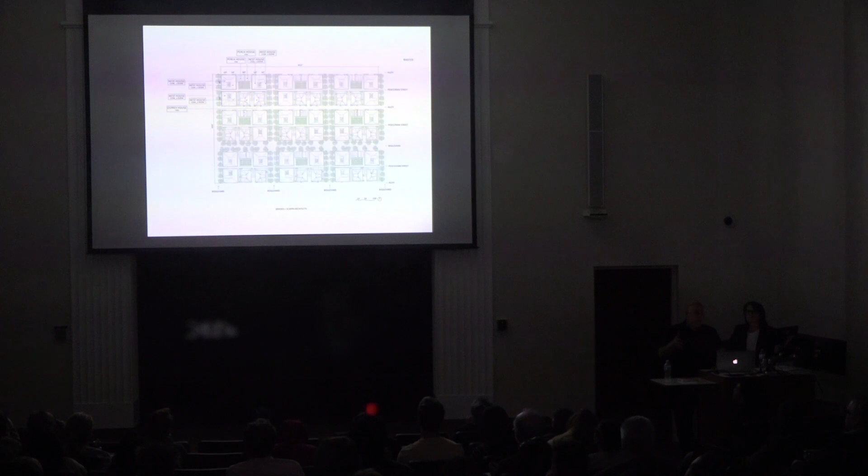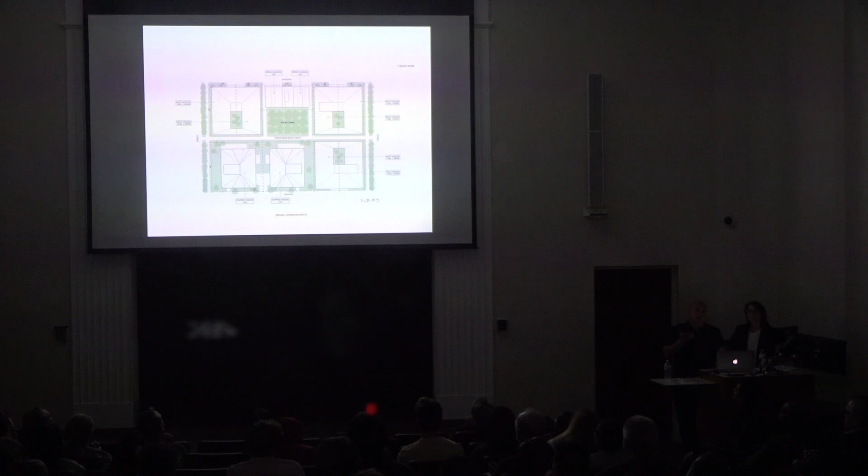So it focused on this block where we have a townhouse model. They're small units, compact on a particular site, and they all share a park on each block. It's a small block so that you can walk, and each park could have its own feature — it could be a bocce ball court on one, a garden in the other. So the people would walk to each block, and they have shared parking and a place for guests.

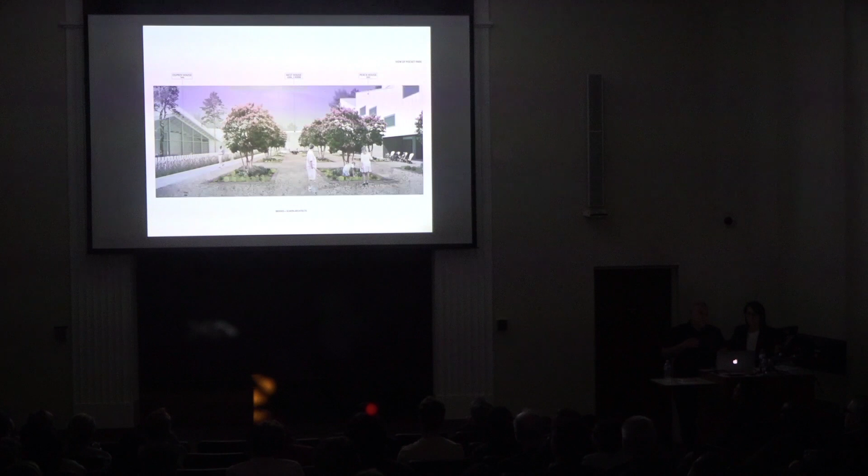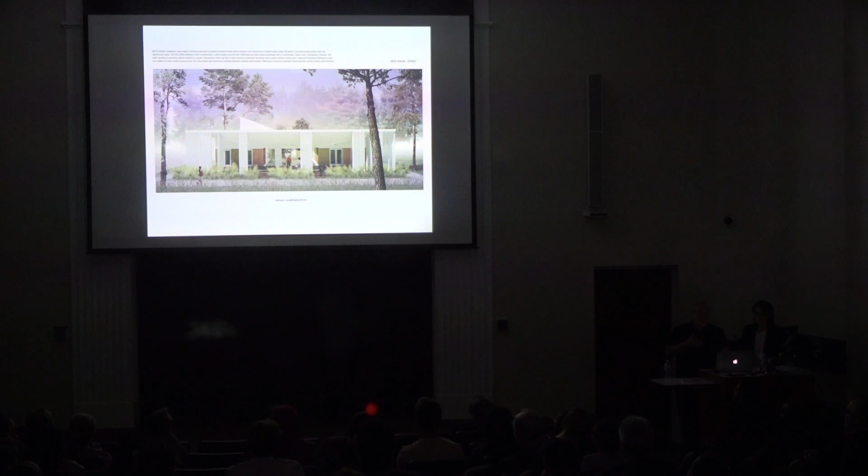So here's what a courtyard might look like. And then this is the townhouse model where they're actually joined together and they share space. This is what it might look like, and their courtyard. And then you can see how the units work together.

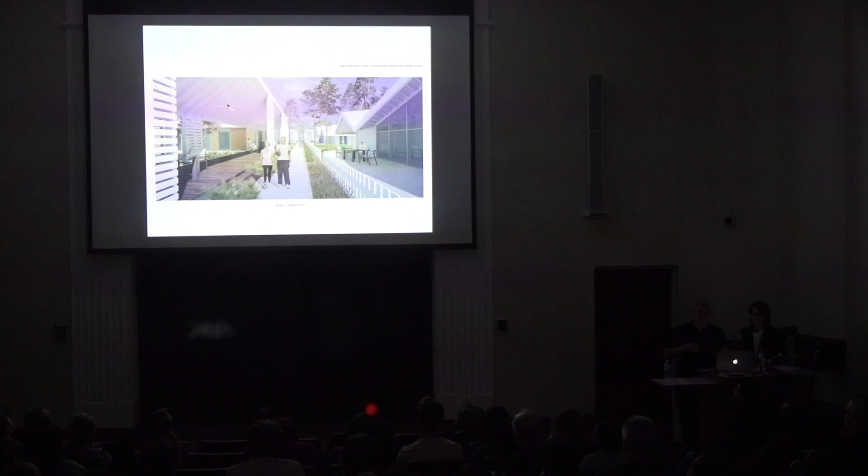So you want to talk about that? This one? Yeah. Sure.

In Los Angeles, the vacancy rate is among the lowest nationally. I think our vacancy rate is like 3% in 2017, and it's remained unchanged since 2012. So we know we need to do something about that.

And we were recently honored with a grant from LA County. They had a Housing Innovation Challenge, and they were awarding $4.5 million for ideas about how to solve the problem of homelessness. We won $1 million with Community Corporation of Santa Monica and Plant Prefab. And Steve's here, our partner from Plant Prefab.

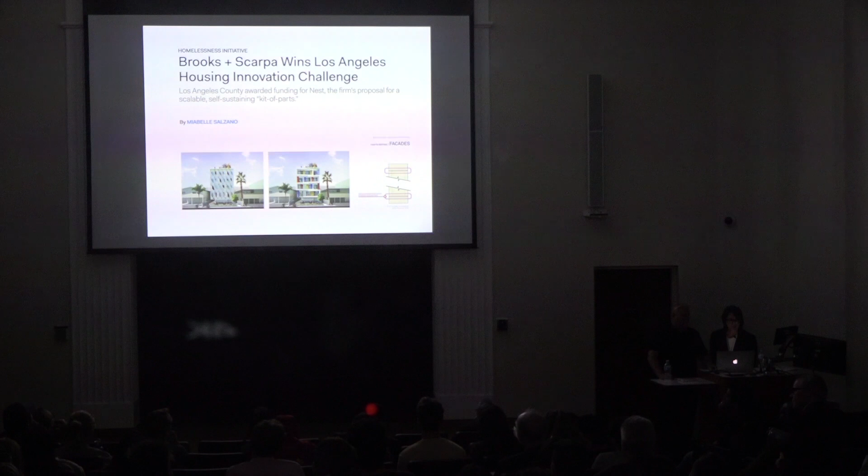So we developed a design toolkit called Nest, which is really a kit of parts to solve this problem. When we took this on, we were kind of thinking more like an RV. Part of the problem is getting it to market quickly, and if you could take a house and just drive it onto a site that was self-contained, you could have instant housing. What really bogs us down is getting permits and doing things like that. So we were thinking along those lines where you can almost just plug in and it would be a self-contained unit, but maybe something with a little more charm, or that could be personalized.

So we came up with this idea of Nest, which is a weird thing — a toolkit where we were kind of the designers, but we really are providing a framework for others to also do housing.

One of the things we realize is that as we develop this housing, as we have over several years, we repeat a lot of the same things. A lot of the units are the same size, a lot of the shared spaces are the same. So we were thinking how could we standardize that? Plant Prefab, who designs modular sustainable homes, was the perfect tool, we thought. And we could tailor that process to meet affordable housing guidelines so that any developer can go and get a module for any site and any type of unit.

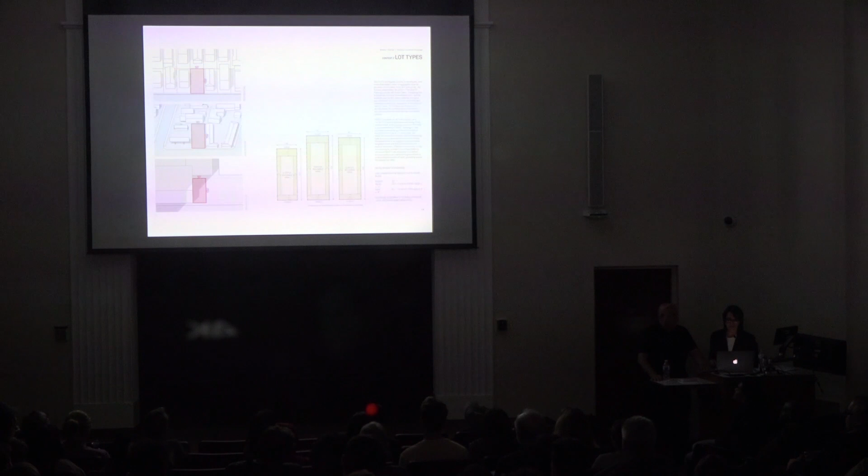We know most of LA has been gridded on a typical suburban lot of about 50 by 150. So we started with that size and made sure the modules would work on a lot of that size with typical setbacks, or a combination of the typical suburban lot. And we developed this kit of parts.

Some of you may have heard or seen recent articles about homeless college students. 60% of the 40,000 students surveyed at dozens of California community colleges reported being housing insecure, and 19% say they're homeless. So housing college students is a big issue we should all be thinking about.

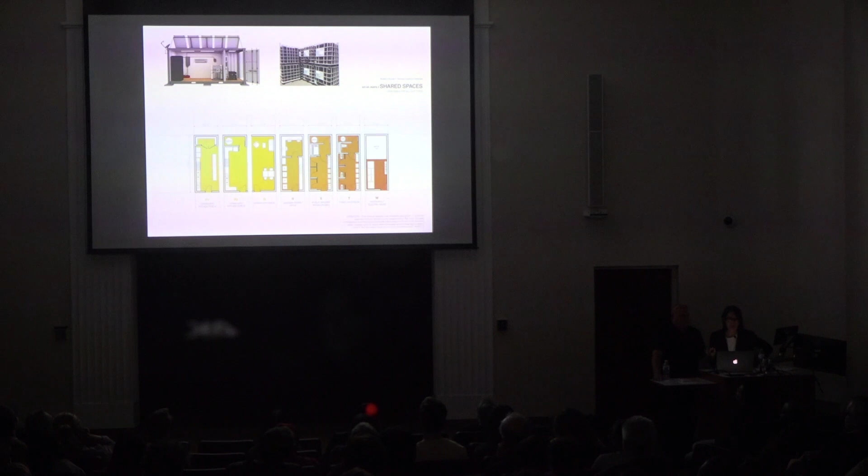So we need more housing types, which means we need more shared spaces. These modules are actually shared spaces - common kitchens, workspaces, shared bathrooms, and on top are small energy module plugins, with power and water plugins that go with it. So ideally, you could just take these to the site and have instant housing while we go through a permitting process to get utilities and other things.

These are the dorm-type modules with beds, called Blue Jay. We've named them by birds, and all of them are based on the nesting habits of birds. Blue jays never use the same nest twice, so our shared living arrangement is the Blue Jay.

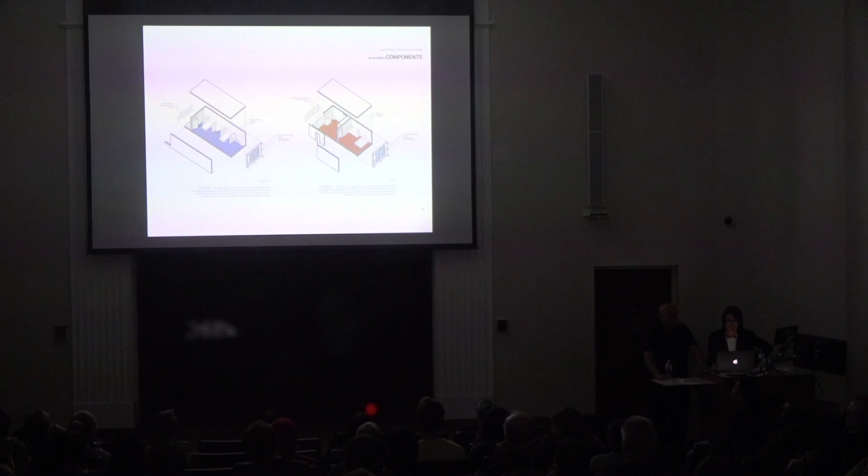They all have standard components that can be mixed and matched. Depending on the site, density, or neighborhood, any component can be used up to 5 stories. We've left just enough room so an architect can work with the perimeter or edges of the building to customize it in a way that works for them - you can customize it for the orientation or the context.

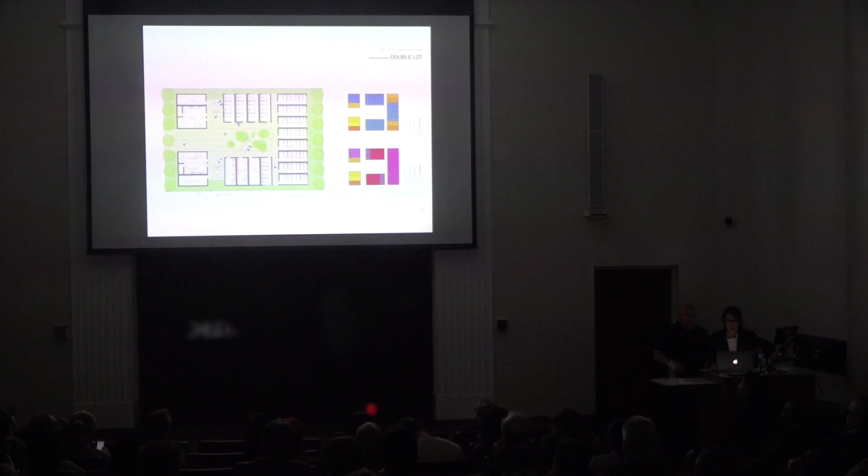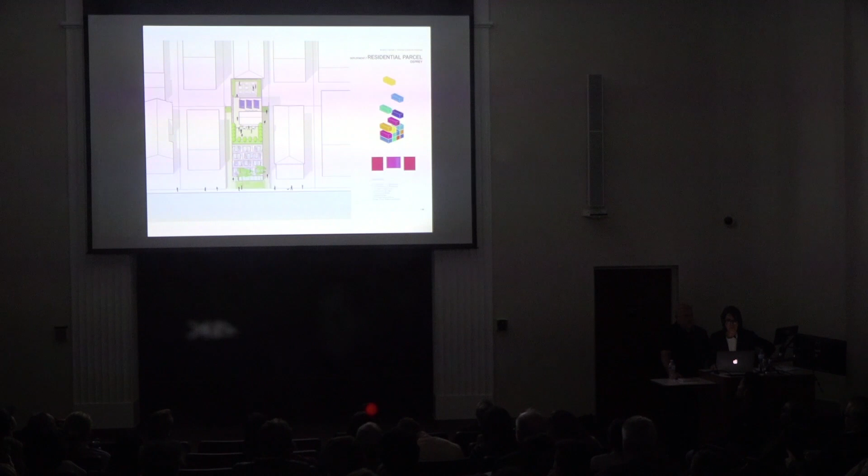This is how it might lay out in a shared living arrangement on a double lot. This is a single lot, in a single family or multifamily neighborhood. It's really meant to be a long-term solution that can be replicated throughout the county of LA.

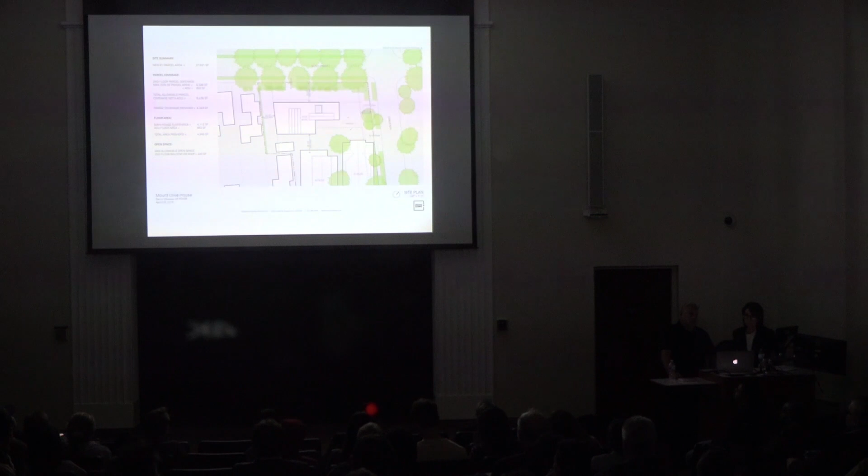This is something we're working on right now, for college students, on a church parking lot. So you can see generally how the configuration of lots are.

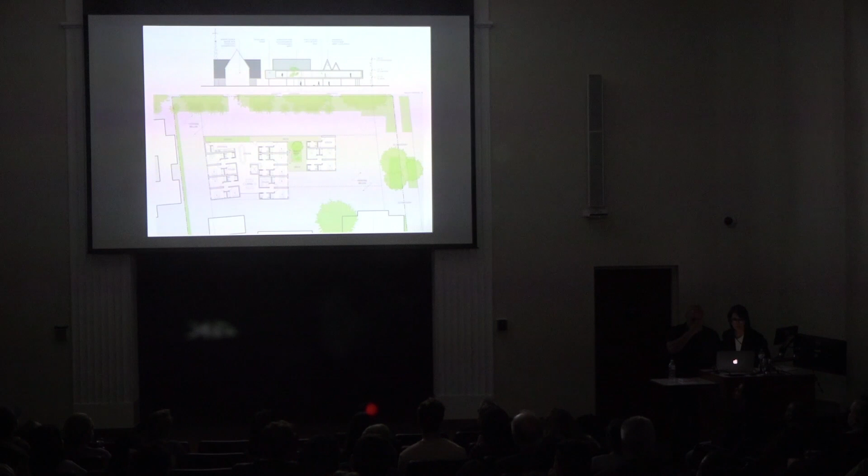This is another one we're working on - a 7-story building. You can see these are prefab 1 and 2 bedroom modules, at another typical height, and this one will be 7 stories. So we're working out through this now how these actually work.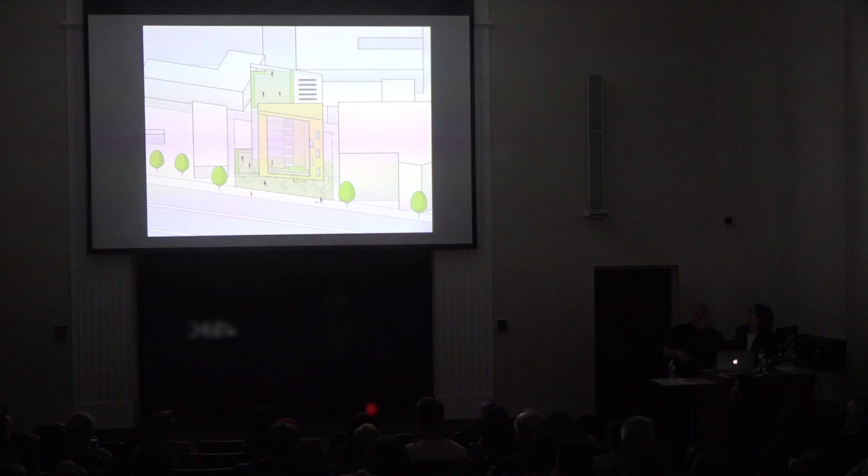So the first ones we're going to build - with Steve Glenn and Plant Prefab, we're hopefully going to come to market in due time with modules that everyone here could buy and work with and make their own.

I want to close for a minute to say a couple words about our exhibit. We spoke about housing - it's kind of interesting now that we've practiced for enough time. I remember having to really work hard to find enough material to speak for an hour. Now it's hard to edit things. So we don't only do housing, but it's a big interest of ours.

This is something else we've been working on for the last 5 years, which started with a grant from NOAA. We got a very large grant to look at coastal areas. Angie and I both grew up in Florida, and Florida is basically a river of grasses. What's happening now is the coastal areas of Florida are seeing big problems with water.

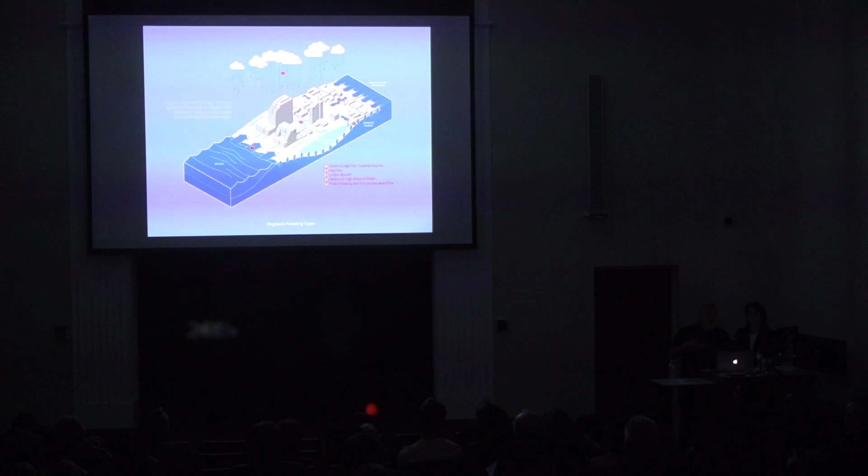What's essentially happening is that the land is being attacked on literally 5 fronts. We're not just getting sea level rise, but a groundwater surcharge pushing the freshwater lens up to the surface, and intercoastal water pushing the other direction, plus lots of rain. This is now a common occurrence in Florida - and this isn't even after a storm.

This is what everyone in South Florida now refers to as sunny day flooding. What happens is on just a sunny day, when tides are right, the water starts backing up through the storm drains. So this is salt water about a mile away from the ocean coming through the storm drains, and it's happening with greater frequency.

Our team has a lot of scientists and engineers who have been looking at this. It's really a common occurrence, and the cities are really desperate trying to find ways to deal with it.

Some of the things they've done is put check valves on their storm drains so it doesn't back up. But then you get water that sits in the pipe, so they're getting mosquitoes breeding in them. So now they have trucks that go around and suck the water out of the storm pipes, and they dump it in the intercoastal, and it's killing all the natural vegetation.

So our work has been kind of focused on what can we do in these coastal areas to kind of live with it.

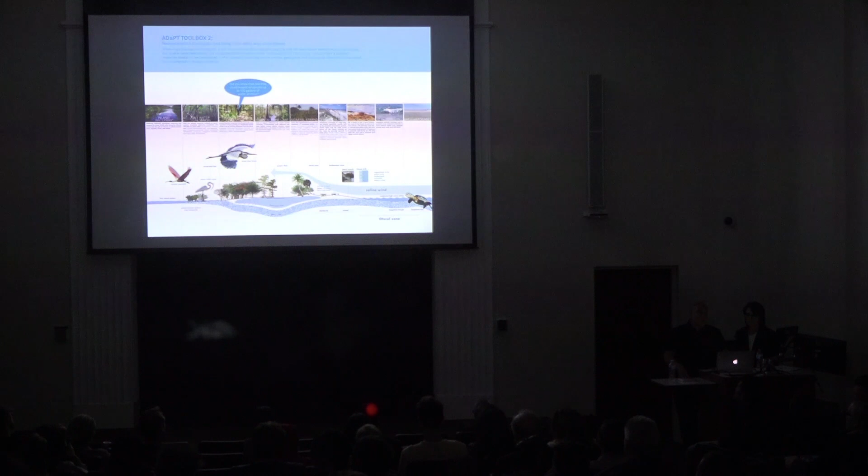So we've developed what we call the ADAPT toolkit, and we're basically putting together what we hope to be a book within the next 18 months, which are strategies for looking at how people can build in coastal regions. I'm just showing you some of the diagrams and drawings from what we did, but we're basically taking scientific data and putting it into formats where regular people can read it, and it becomes almost like a menu book for what to do.

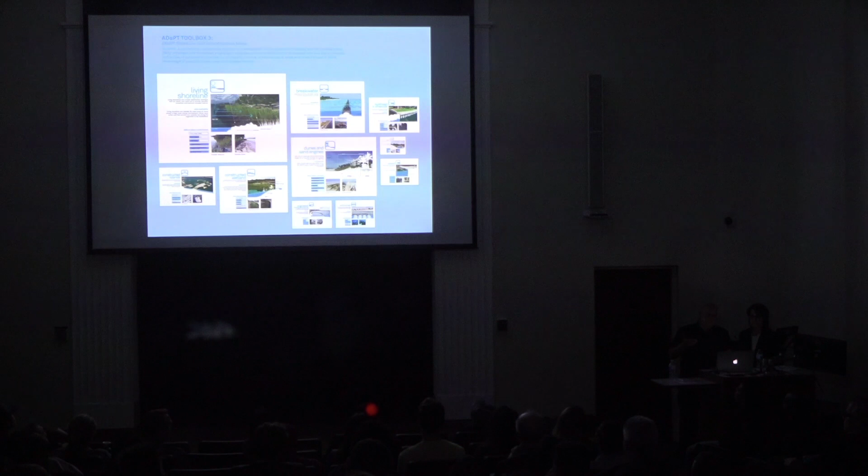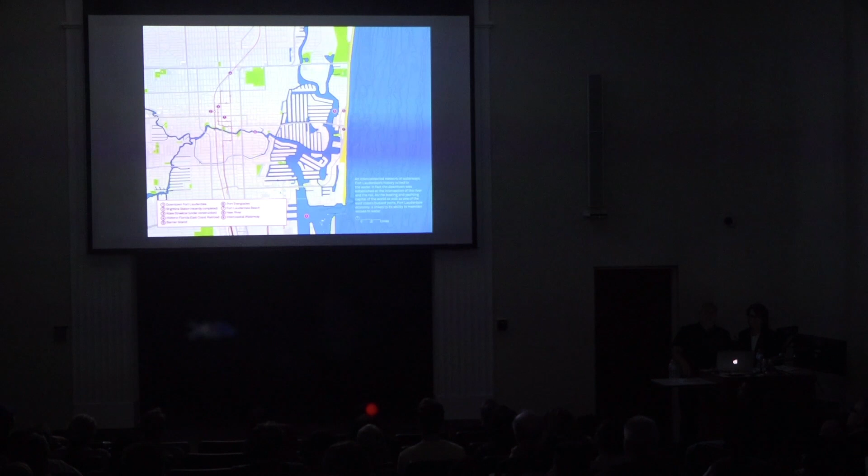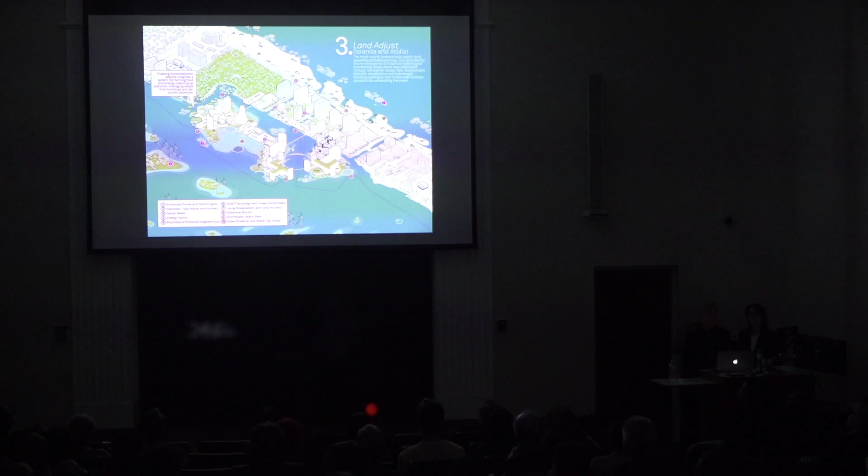We've done studies of areas, this one is in Fort Lauderdale, showing city officials what can happen to their neighborhoods. This is an area called North Beach, with 3 feet of sea level rise in that area. So we've shown strategies about how we can embrace the water.

Our students have even presented to the officials. There are 3 of them here tonight, and Sunny, on the end, she's going to be going to grad school at Harvard next year, right?

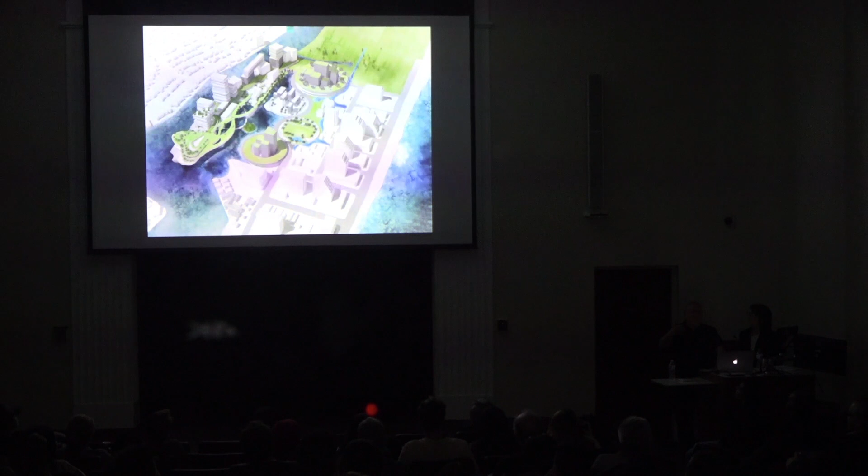But this is some of the student work where students can do things that professionals can't do. I always try to tell them, you have incredible power because you don't understand the politics, which is a good thing. If I were to show this design to a public official, I would be murdered, but because a student does it, it's okay. So they think it's not real, but it's amazing how they do this work, and it receives good attention.

Well, we did. One of the images was in the Argonaut, the Venice master plan that you guys did, and a few homeowners got really upset because their properties were underwater. And we said, well, it's just a student project, so don't worry about it.

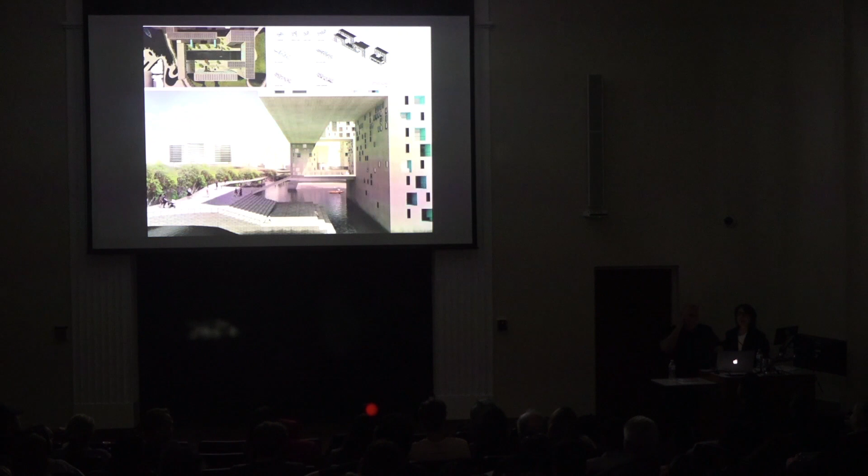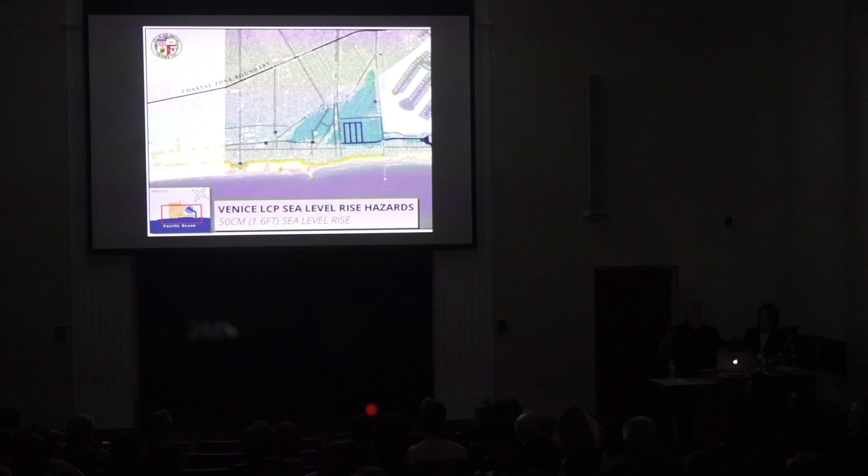This is why Venice is particularly vulnerable. This is with 1.6 feet of sea level rise, and it's basically in a bowl. When they built the marina, think of it like a cork at the end of the marina that's keeping water from flooding Venice.

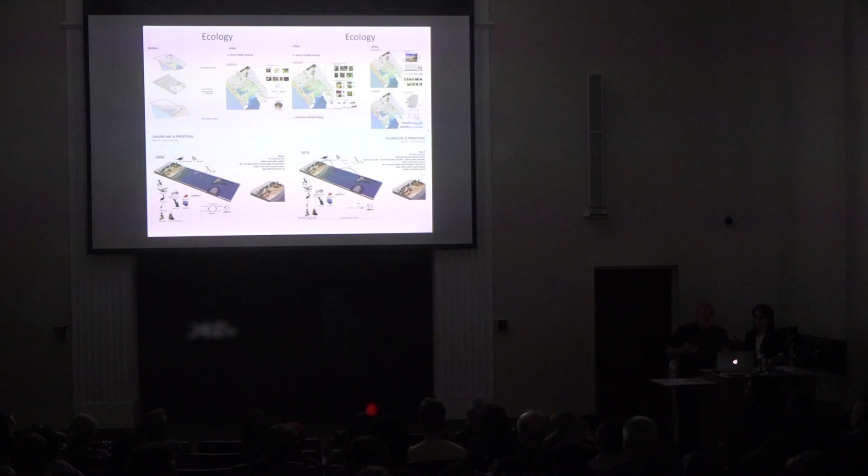So we undertook this with students here, and Claire, who I saw here tonight, is one of the students who participated in this, and we engaged the city in doing this. Again, I'm just showing you some of the things that students have participated in to help raise awareness about some of these issues.

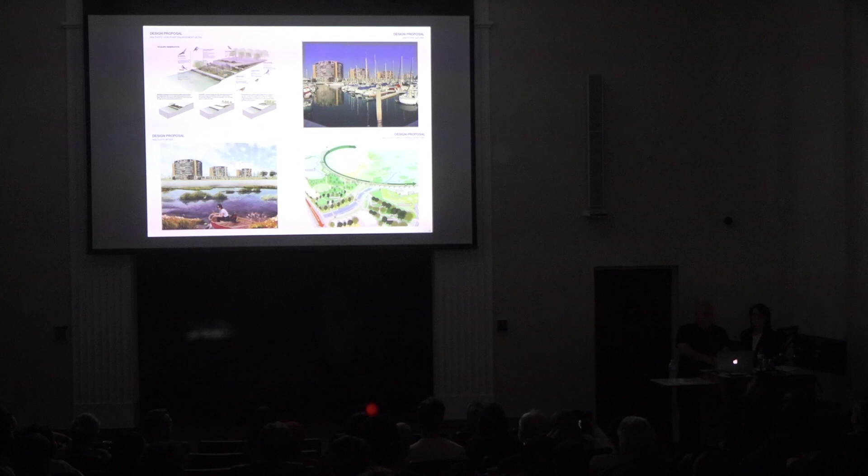Our partner in Florida, Jeff Huber, has really spearheaded a lot of this work with his ongoing research. So go see the show. It's by no means comprehensive, but it'll give you a kind of flavor of what we've been doing there. Thank you very much.